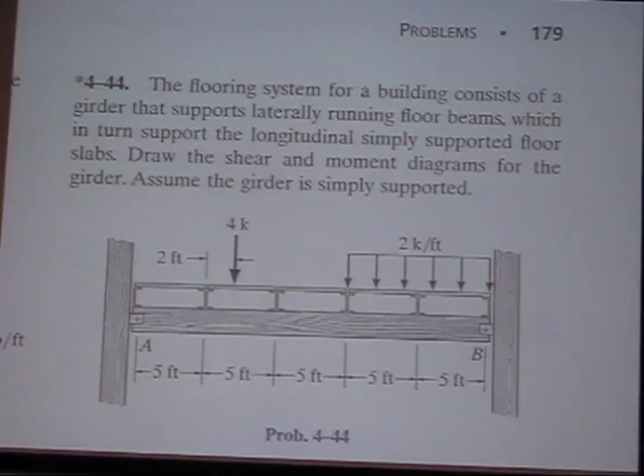Okay, this is problem 4-44, and what's going on here is there is a floor panel on top of 6 beams, and all the beams are resting on top of that big girder. In order to solve this problem, we split up the floor at each one of the beams, solved for the forces that are in those beams individually, and then once we knew the forces in the beams, we knew all the forces that were pushing down on that girder.

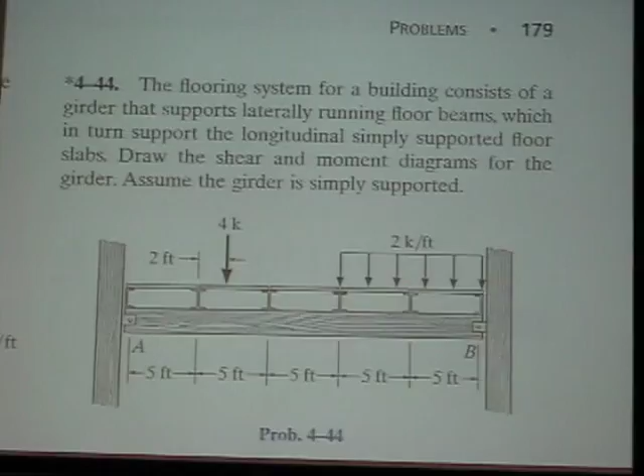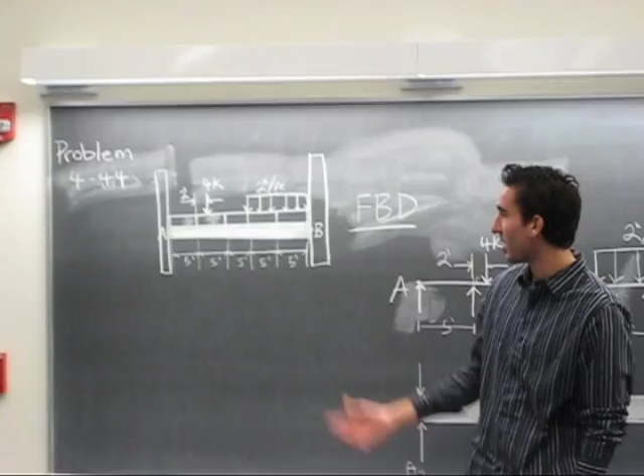And from there, we drew the free body diagram of the girder itself and made a shear moment diagram from it. Okay, so on the board here, we've already drawn out what the free body diagram would look like for problem 4-44.

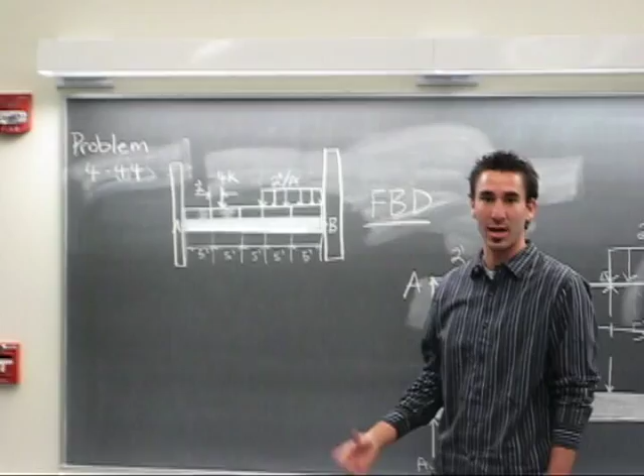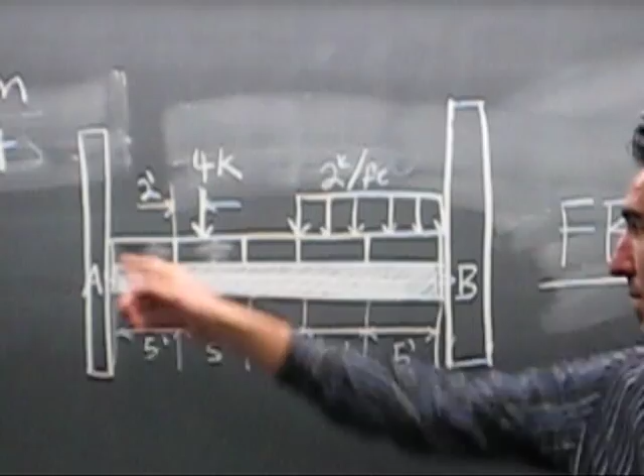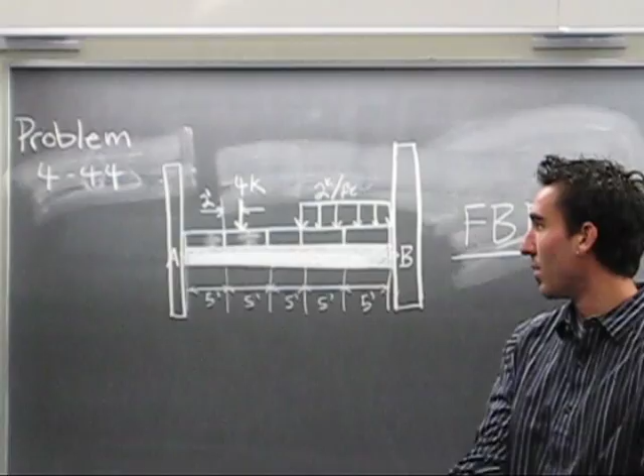Here in this shaded region, we have the girder AB, and then each of these vertical lines right here are the beams that rest on the girder, and then this line right here we have represented of the floor plane. As you can see, they're all 5 feet spacing, and then we have the single 4 kip load there and the 2 kips per foot load right here.

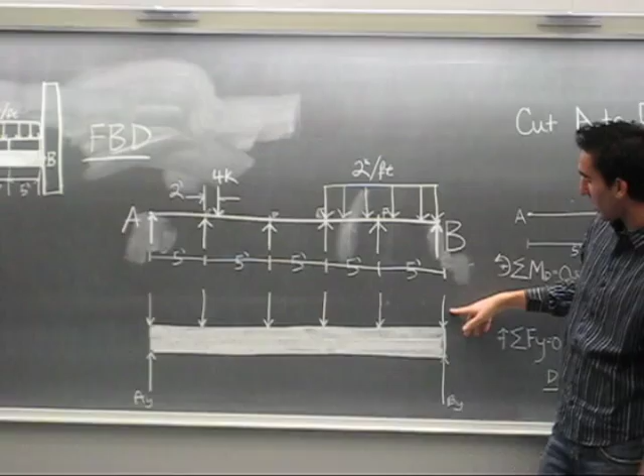And if we move on to the free body diagram of the beam that we have over here, you can see that we broke up the middle of the beams and we assumed that we had positive vertical forces at beams A, B, C, D, E, and F. We also have equal and opposite forces pointing in the downward direction on the girder, which are expressed right here by the arrows pointing downward.

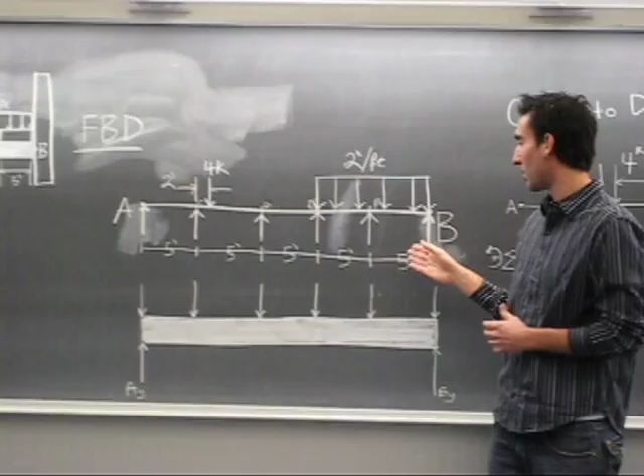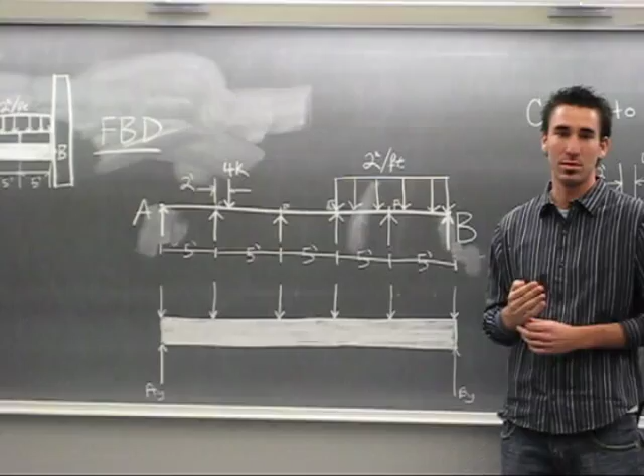So we know that what we have to do to solve this problem is first solve for the forces in the vertical direction for points A through F. And then as soon as we do that, we'll be able to go and take those forces and display it in our free body diagram.

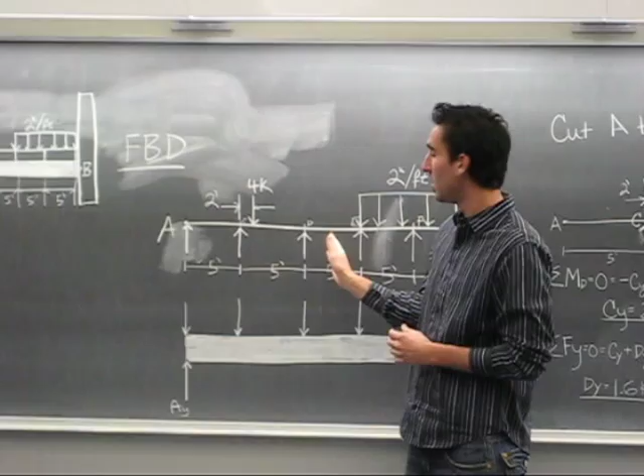So if we move on, the first thing we do is we take a cut right in between numbers D and E, and we'll have a free body diagram A, C, D as expressed in this drawing right here.

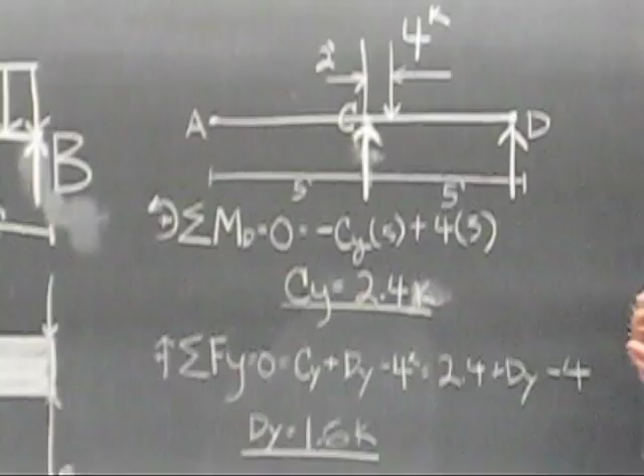First, what we notice from this free body diagram is that there are zero forces at A, and this is due to the fact that when we analyze this problem, we break it into sections. So if you look at only section AC, you can see that there are no vertical forces affecting the support at A. So we know that there aren't going to be any vertical forces acting on point A.

Whereas if we looked at point C through D, we know that the 4 kip load here will have to be taken in part by the beam at point C and in part by the beam at point D.

So to solve for the vertical forces at C and D, we first take the moment about point D. Now you can take the moment at point A, or at point C or at point D, but you can't take it at A because we need to get rid of one of the forces that we're trying to solve for.

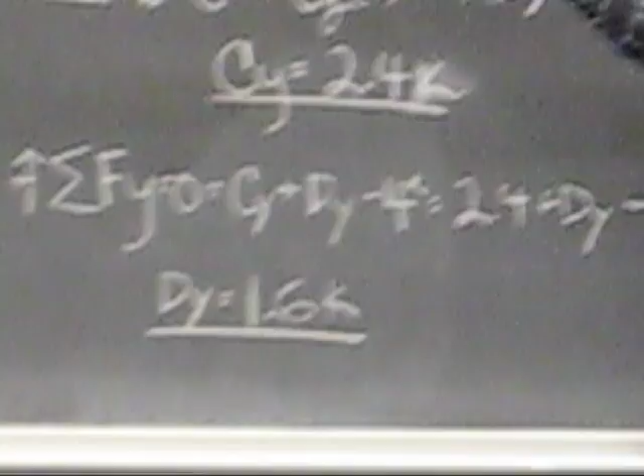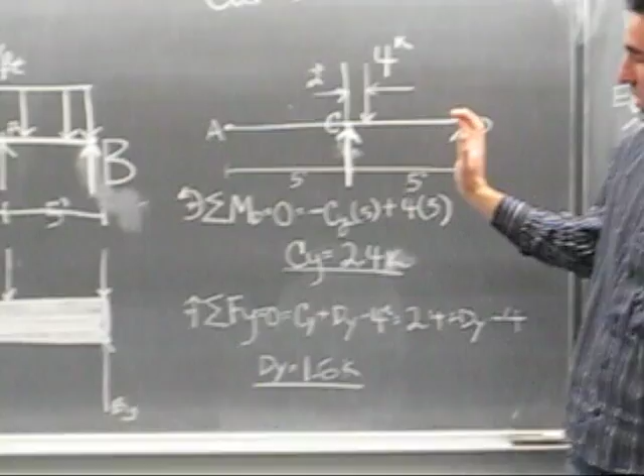So we arbitrarily chose to take the moment at point D, in which case we also had the positive direction being this way, as expressed right here.

And so we said that the moment about D is equal to our vertical direction CY, which will be in the negative direction, and it's also 5 feet away. So the negative CY at 5 feet, and then we added on the 4 kip vertical load, which would be in the positive direction because it's going with the positive direction moment that we have assumed, and it's acting at 3 feet away from point D.

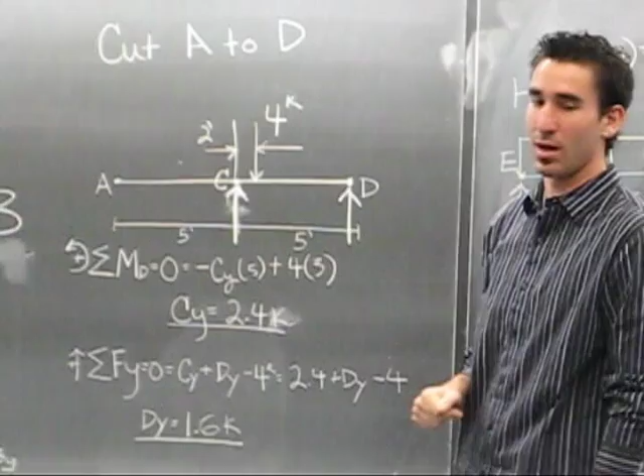So from this equation, if you do the math, then CY turns out to be 2.4 kips.

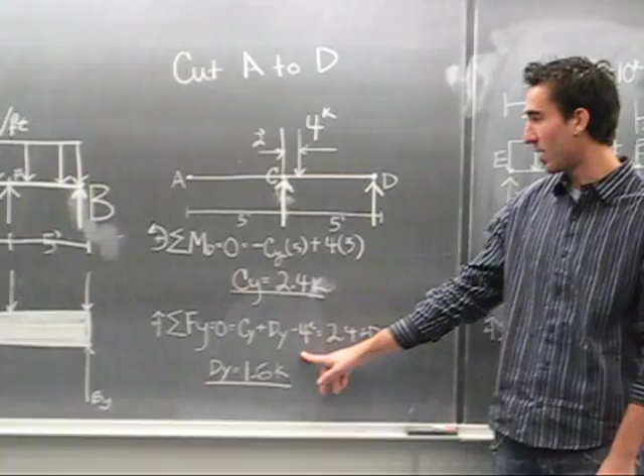So once we found that force CY is equal to 2.4 kips, we next sum the forces in the Y direction, and we get that CY plus DY minus the 4 kips is equal to 2.4 kips plus DY minus 4 kips. So then we have that DY is equal to 1.6 kips.